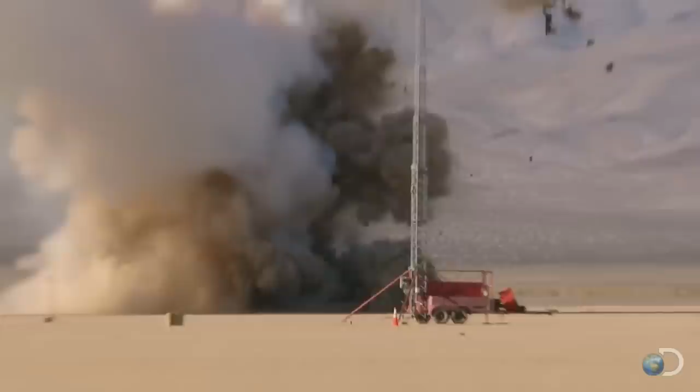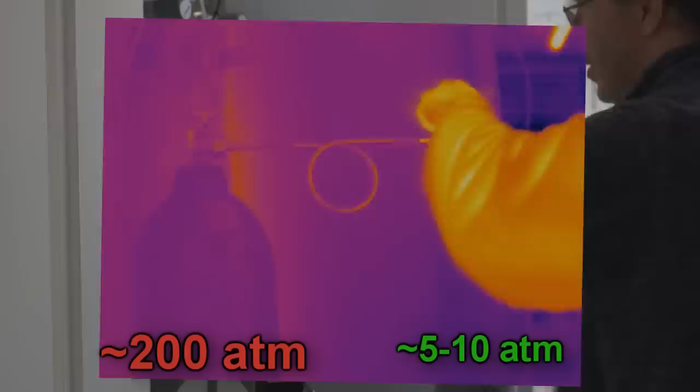Well, actually no, it's a really, really stupid idea. And to show why, I'll be calling on a guy who Elon Musk fans probably think is somewhat of an authority on the subject: Elon Musk. Now, on my last video where I was just showing some of the practical difficulties of dealing with compressed gas, there were lots of comments that said Elon Musk was just joking here. He wasn't serious. It's kind of difficult to sustain that when you see some of his other tweets.

David Jenkins writes, I reckon it's an adapted cold gas thruster used in their upper stage rocket guidance using plain old compressed air, to which Elon Musk replies, using the configuration you described plus an electric pump to replenish air in COPV when car power draw drops below max pack power output makes sense. But we're going to go a lot further. Yeah, he's talking about how he's going to implement this. Doesn't sound like he's joking to me.

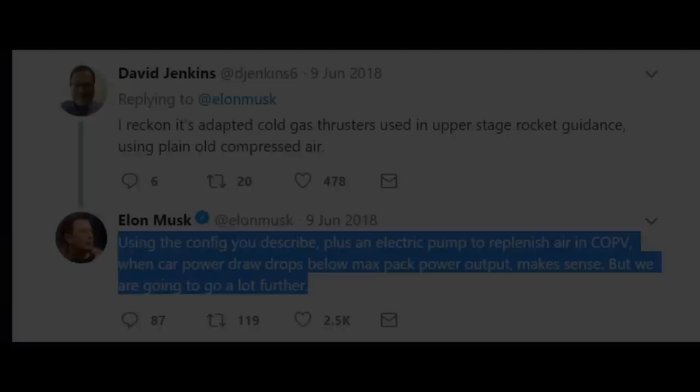We're going to put rocket thrusters on it. For real? Yes. What are they going to burn? Nothing. Ultra high pressure compressed air. Whoa, just gas, air? Cold gas thrusters.

So why is this such a stupid idea? Well, let's start with the most obvious question of all: so what are cold gas thrusters? Well, it's pretty much what it says on the bottle, the compressed gas bottle. So that's all you do is you get a cylinder of compressed gas, air say for instance, and then you just open it up, the gas comes out, and you get some thrust because of that.

About 50 bar of argon. So we get ourselves steady. And fire! The downside is, of course, they don't provide much thrust. In fact, they are some of the least efficient thrusters that you can get.

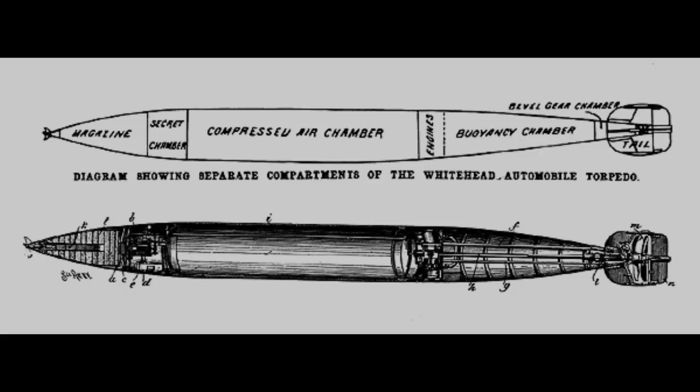Now, compressed gas as an energy storage system isn't quite modern SpaceX technology. This is one of the oldest ideas out there. I mean, really old. The first torpedoes ran on, you guessed it, compressed air. All right, it wasn't a cold gas thruster. They fed it through a little internal combustion engine type thing that ran the propeller.

But there's a big problem with using compressed gas like this as energy storage, and that's as you vent it quickly, it gets cold, really quite quickly. It's a thermodynamic property, you cannot get around it. And that means that you get a lot of thrust at the beginning, and then its ability to provide thrust gets progressively less as the gas gets colder.

Now, this has been known about for over a century, so the very first torpedo designers tried things to get around this. First of all, you put some big radiator fins to sort of try and get some heat into that cooling gas, which of course increases the energy that you get out of that compressed gas. Or even better, why not just inject the fuel straight into the compressed gas in this little engine thing, and hey presto, you've more or less got an internal combustion engine.

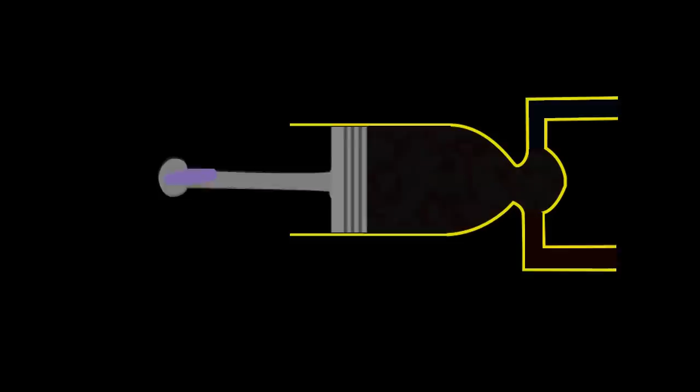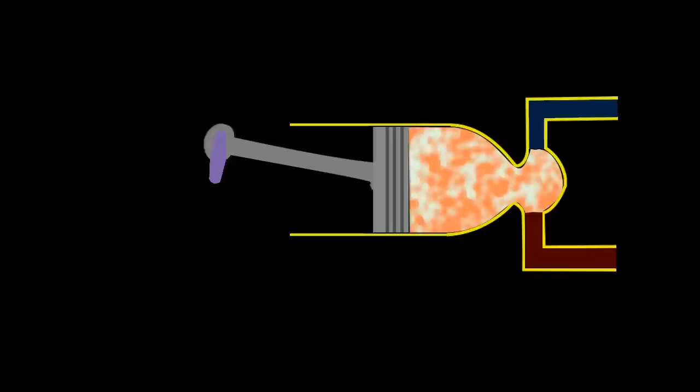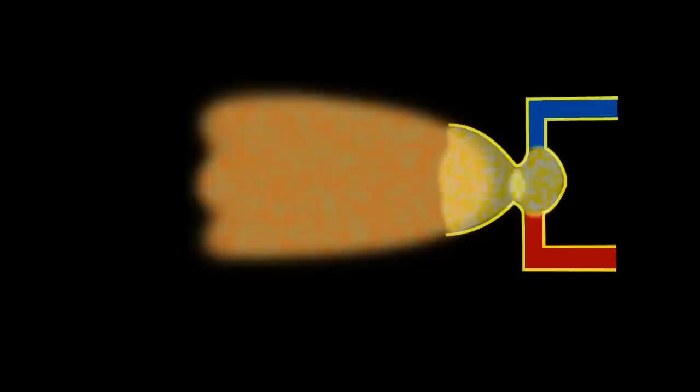However, you can pretty much do the same thing, but you just don't add the fuel. The downside is, of course, it's a cold gas thruster, it doesn't provide much thrust. In fact, they're almost bottom of the barrel in terms of how much thrust you get per kilo of propellant. Now, you may have noticed, just looking around, that you don't see many cold gas thrusters around on cars, while internal combustion engines are fairly common.

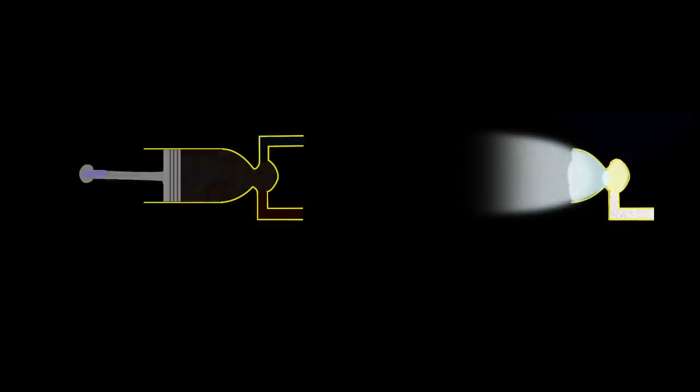And there are two very, very good reasons for this, or more to the point, there are very good reasons why Elon Musk's idea of putting cold gas thrusters, both to help the car maneuver and maybe make it fly, is a really stupid idea. And this is the moment you've waited for, where we call on the guy who Elon Musk fans probably think of as the greatest authority on this sort of thing: billionaire and inventor of the wheel, the hyperloop, Elon Musk.

There are some drawbacks to flying cars. They are essentially a helicopter with wheels, and they make a lot of noise. There's a lot of wind force, and the probability of something falling on your head if there are a bunch of flying cars around is much higher than if there are not.

So you got it, that's why flying cars are completely impractical. They make too much noise, and they create too much air blast. The fact that cold gas thrusters are bloody noisy. Chamber is about 100 psi. Here we go.

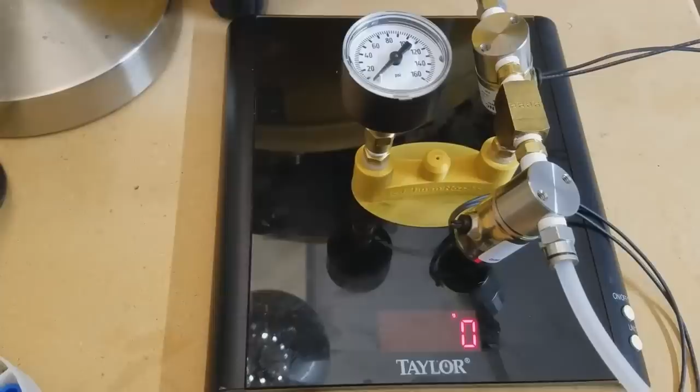And it doesn't really make any difference whether you get the thrust from a cold gas thruster or from a propeller. In both cases, you're accelerating gas to provide lift, or thrust. The air blast's going to be almost exactly the same in both cases. I mean, look, let's just get on the same page here.

This is a 50-litre cylinder. Here I have a 50-litre gas bottle, and it weighs about 50 kilos, which is pretty heavy, to the point where, if I'm in good shape, I should just about be able to lift it, just about. So they're pretty heavy, these things.

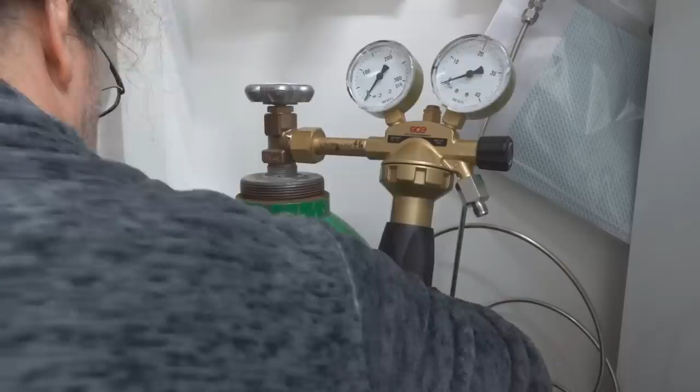Now, this one's actually argon, but we're going to assume for the sake of argument it's compressed air, as it would be with Elon Musk's cold gas thrusters. So let's assume this is an air cylinder for the moment.

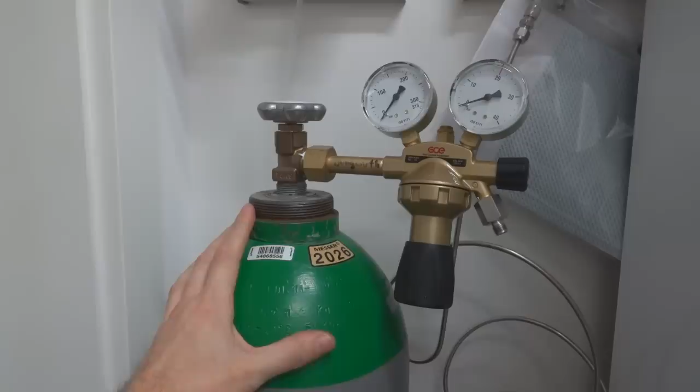So if I take the top off this cylinder and it's at 1 atmosphere pressure, then the volume of the cylinder is 50 litres. The density of air is about 1 gram per litre, so there would be about 50 grams in this cylinder. Now if I put twice as much gas in the cylinder, the pressure goes up to 2 atmospheres, 2 bar, and the amount of gas in the cylinder goes from 50 grams to 100 grams. And now if I go from 2 bar to 20 bar, another order of magnitude, 20 atmospheres, then it goes from 100 grams to 1 kilo. And if I go from 20 bar up to 200 bar, 200 atmospheres, then there's going to be about 10 kilos of gas in this cylinder.

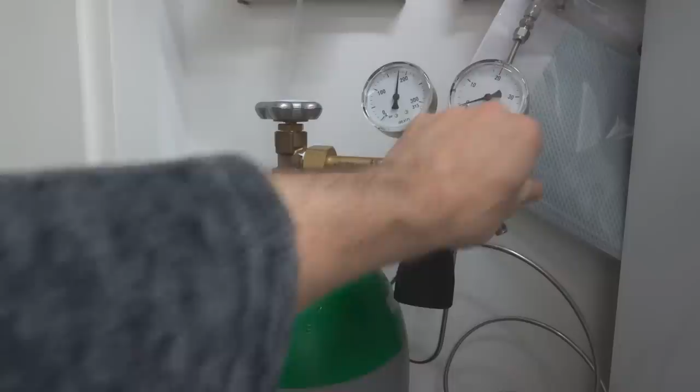And as it turns out, at the moment the cylinder is closed. This is the primary regulator, which tells me how much pressure there is in this cylinder, and it's just short of 200 atmospheres. And then I've got a secondary regulator here which is going to tell me what the pressure is.

So I'm just going to put on, I don't know, a couple of bar, right? And we're going to open it. So that's just a couple of bar, a couple of bar I can hold with my finger, not that big of a deal.

If I jack this up to 6 bar, yeah, it gets harder to hold with my finger. Alright, and if we jack it up to about 10 bar, it now gets really difficult to hold with my finger. I really can't do it.

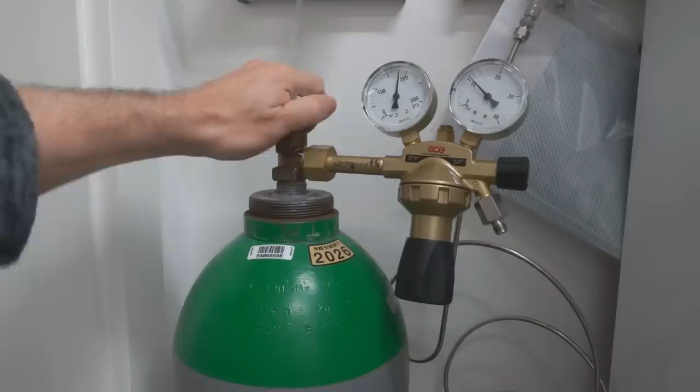Right, that's 10 bar. If I take this off and open the cylinder, that's 200 bar, which, as you can tell, is going to be loud. So let me get a wrench and I'll do that. Okay, so this is now going to be 200 bar, okay? Alright, make sure you're actually braced into the wall.

Loud enough? Whew, it's quite a blast comes off that. But anyway, so that's what 200 bar looks like. And that's basically what Elon Musk would be proposing to use to accelerate and decelerate his cars, which is an absolute farce on so many levels.

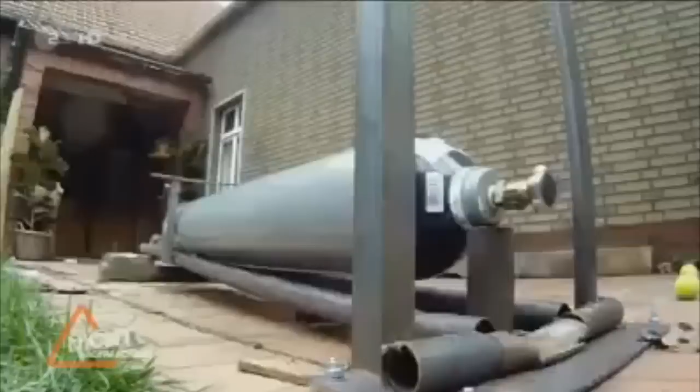Now, for certain, there is quite a lot of destructive energy packed into these high-pressure gas bottles. Hell, you know what originally caused this? Well, it's going to take the sound a little time to get here, but the first thing you're going to hear is the sound of a high-pressure helium gas bottle failing. Then the sound of the explosion arrives.

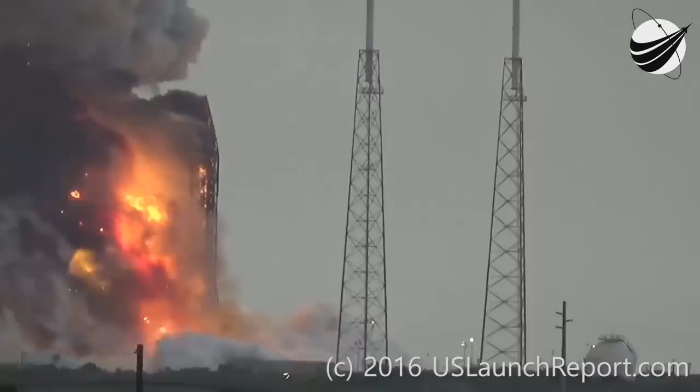Yep, it was a high-pressure helium bottle failing and rupturing the propellant tanks. This is why the cheapest and safest way to handle high-pressure gases is in big steel cylinders like this. And even those at their cheapest are about $100 per shot.

Now, sure, you can about halve the weight of these cylinders if you don't mind about the cost, and make them out of composite materials like Elon Musk wants to do with his car. But this will greatly increase the price. Maybe not something you want to be doing if you're laying off people to try and get the prices of your cars down. But all of these cylinders take in the region of 200 bar, because that's when it really gets quite difficult to contain all of this energy.

Just to give you a feel for these things, for the safety limits, these big steel cylinders are only allowed to be pressurized to half of their failure limit, because you don't want to go near the failure limit. And with the composite cylinders, it's a fifth of the failure limit. Why? Well, 200 odd bar is a lot of pressure, and you have to respect your high pressure gases.

14 pounds per square inch, 14 psi, is about 1 bar, but whatever. Let's not worry too much about the little numbers. Let's just say about 10 psi is 1 bar.

Blast injuries to exposed personnel, represented by this dummy, is usually severe over 3 psi. Here it was 6 psi. So this was about half a bar overpressure, and it throws a guy around like this. A 200 bar overpressure of a rupturing cylinder is terrifying. It's something you don't want to be anywhere near, let alone being on the inside of a car with one of those cylinders. One of these cylinders rupturing in your car means all but certain death.

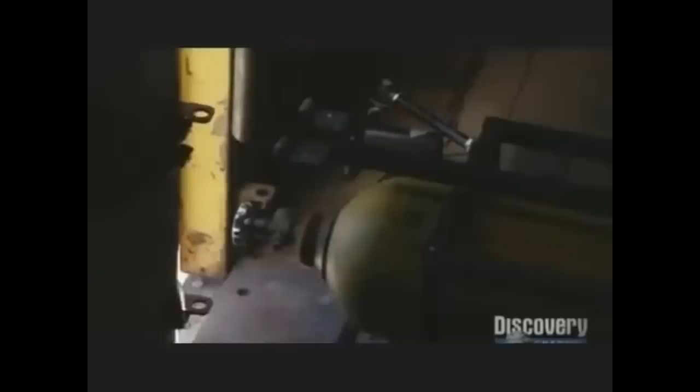The valve has sheared clean off, and that's a very good sign. It looks like the cylinder flew straight and true. At 40 miles per hour, the air tank turned the cinder block to cinders. You know, this was an optimum situation for this tank. What this tank did is as good as it gets.

Well, okay, I'm going to assume the Mythbusters cylinder is about a 200 bar cylinder like mine that weighs about 50 kilos. Those numbers are probably in the right ballpark. And when they opened up this cylinder, it accelerated to 40 miles per hour, which is about 18 meters per second. So the energy is just half mv squared, which is about 8,000 joules, 8 kilojoules, enough energy to shoot this bottle some 50 feet, 15 odd meters into the sky.

So if we were to put that 8 kilojoules of energy into our Tesla, how fast would it be going? Well, a Tesla weighs about 2 tons, so half of the mass is about 1 ton, 1,000 kilos. So V squared is going to be about 8. So V is going to be about 3 meters per second, about 7 miles per hour, that sort of thing. Not looking so good here. But this one may be the slowest ever.

But hey, these are just some ballpark numbers from cylinders losing valves. You know, this was an optimum situation for this tank. What this tank did is as good as it gets.

How would the rocketry people approach this? So hold on, this is all actually kind of coming together. There is some serious possibility here. I can't believe it. But wait, I should totally believe it. I mean, after all, I have played around with fire extinguisher powered hovercraft.

Now, rocketry folk have a way of working out how much bang for the buck you can get out of your propellant.

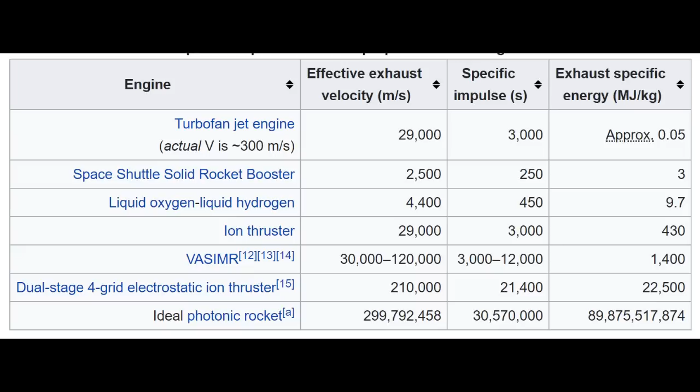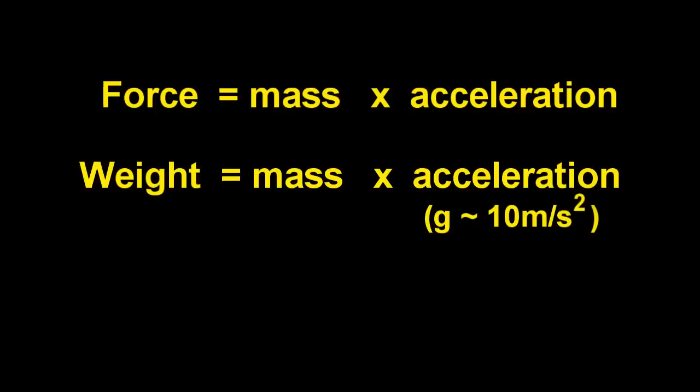Whilst it's correct, it's not necessarily the most obvious. You see, here on Earth, we typically equate weight to mass because they're essentially the same thing, seeing as gravity is essentially a constant here on Earth, and this makes them pretty interchangeable numbers. However, technically they're not. Mass is mass, while weight, like thrust, is a force. It's a mass times an acceleration, the acceleration you experience due to gravity. So, say my mass is 100 kilos, that means my weight is 1,000 newtons.

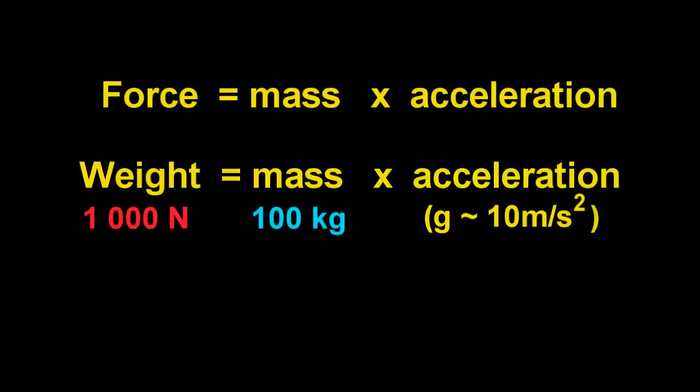Now, specific impulse is how much thrust you get in 1 second per 1 kilo of fuel. But they express that 1 kilo as a force, as a weight. And somewhat confusingly, if you go through all the numbers, you find that this metric actually has units of seconds. But it's basically how much bang for the buck you get out of 1 kilo of fuel.

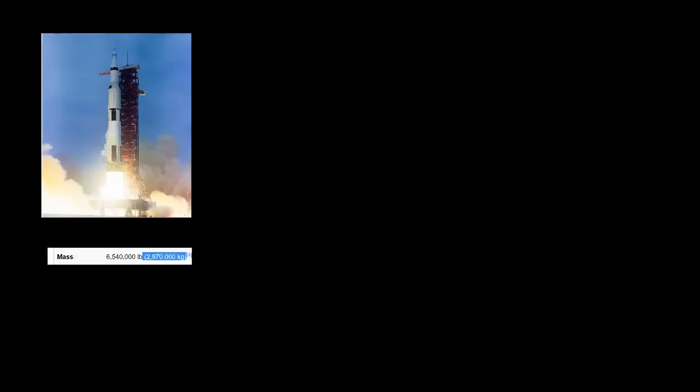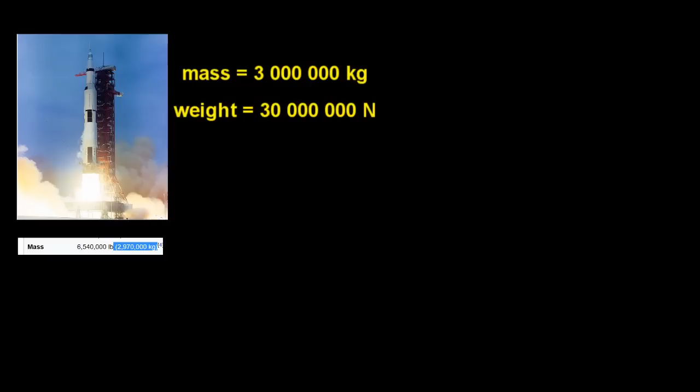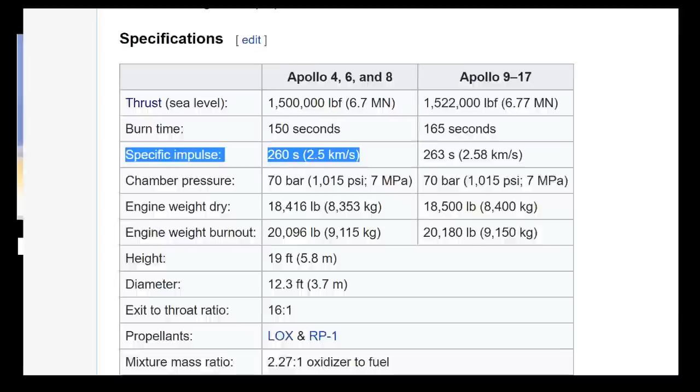So a simple example: the Saturn V had a takeoff mass of about 3,000 tons, 3 million kilograms, or its weight was 30 million newtons. So, if you want to take this off, the thrust the rocket provides must equal its weight - you need 30 million newtons of thrust. The specific impulse of the Saturn V engines was about 260 seconds. So the kilograms of fuel you need to burn per second is about 30 million divided by 2,600, which means you consume about 11 tons of propellant per second, which is about right.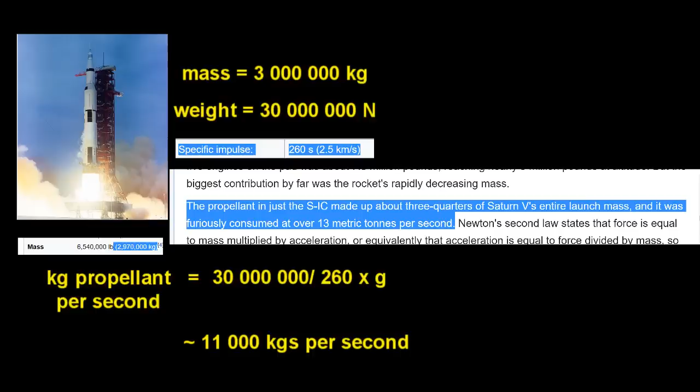Yes, another opportunity to talk about both Teslas and rocket science. I couldn't be more excited. Let's get started. So cool.

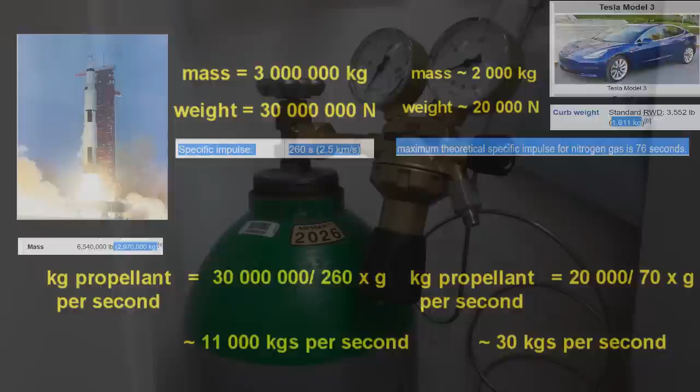A Tesla's mass is about 2 tons, 2,000 kilograms, or 20,000 newtons. The specific impulse of a cold gas thruster is about 70 seconds. 20,000 divided by 700 is about 30 kilograms per second. And seeing as you only get about 10 kilos in one of these cylinders, you would need 3 of these cylinders just to get your Tesla off the ground for 1 second.

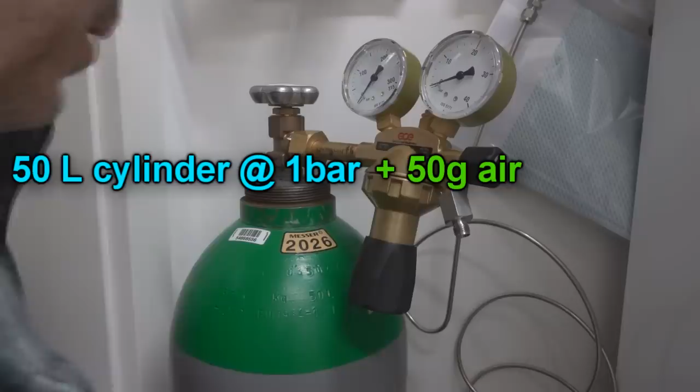But hey, this is the best case scenario, that you get near the optimum 70 or so seconds of specific impulse from your cold gas thruster. In reality, you're going to get nowhere near that, because the amount of useful thrust you get out of a cylinder drops as the pressure drops. So if you have, say, a 50 or so litre cylinder with 200 atmospheres, 200 bar in it, each extra bar you put into that cylinder has about the same mass - they all weigh about 50 grams. So if you're venting the cylinder, you get a lot more thrust out of the first 50 or so grams that comes out, venting it from 200 bar down to 199 bar, than you get out of the 50 grams going from 2 bar down to 1 bar.

Here's a nice simple example using my low pressure compressor, which only goes up to just under 10 bar. This is going to be about 8 bar that we're looking at here on my reaction control system. Let's get steady and...

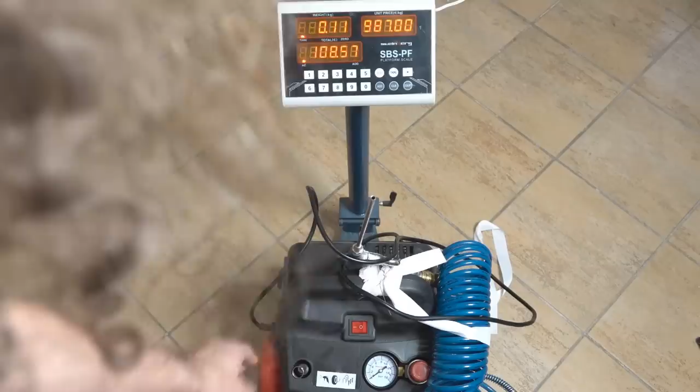Wow, impressive stuff, eh? Here I've got a compressor, and that tells you the pressure in the compressor. At the moment it's empty, and it's sat on top of a balance with the exhaust from the compressor pointing upwards, so this will essentially measure our thrust, and it'll weigh it within 10 or so grams. Just to give you a ballpark feel of the sort of thrust we're going to get off this thing, that's a chocolate bar, Mounds in America, Bounty in England, and they weigh about 60 grams. So that should clock in at 60 grams.

Okay, so let's fill up the compressor first and see how much thrust we can get off - I think this thing goes up to 8 bar.

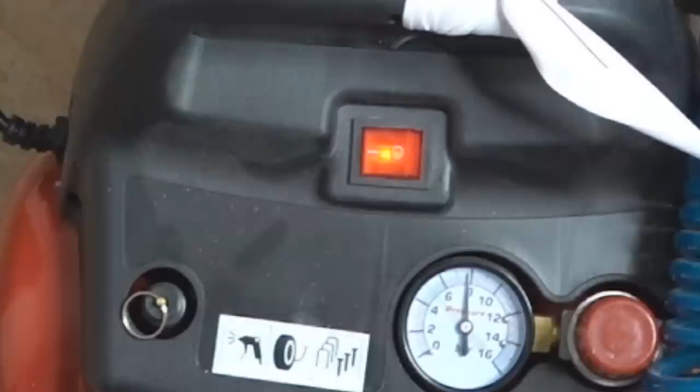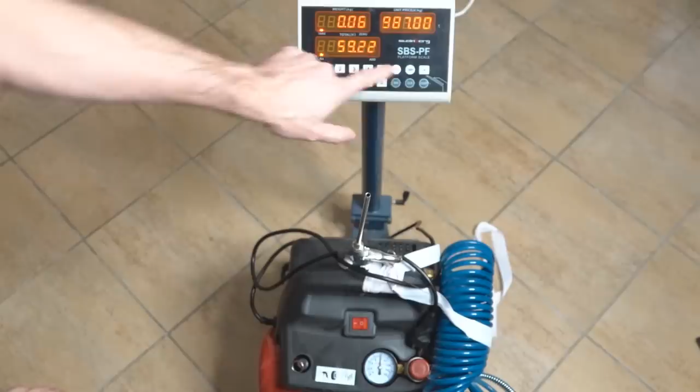Good, so now we have about 8 bar in the compressor tank. So I'm going to zero this. Then I'm just going to hold the exhaust open as we can get, and... that's it.

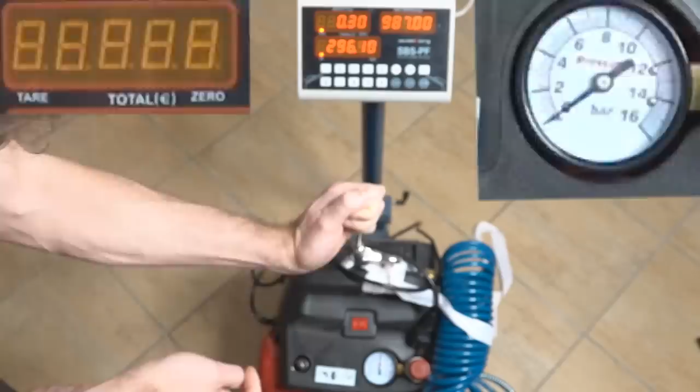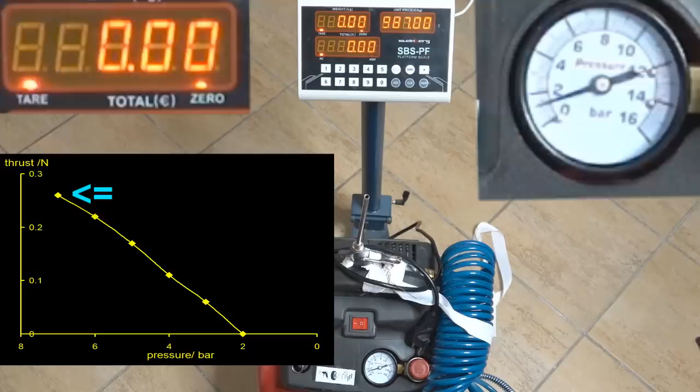So you can instantly see the problem: you only get the good thrust of a cold gas thruster at high pressure. So this up here is going to be a specific impulse of, let's say, 70 seconds. And then, of course, 0 is 0, which means on average, if you're just going to empty a cylinder, you're only going to get a specific impulse of about half the maximum value. Which in practice means it's not 3 cylinders like this that you have to empty in 1 second to lift your Tesla off the ground.

You have to empty about 6 cylinders like this just to lift your Tesla off the ground for 1 second.

At which point we can probably step back and address all the Elon Musk fans who have been complaining like crazy, saying, yes, but you assumed his car weighed 2 tons when it actually weighed something like 1.7. Well, yes, if you now include the weight of 6 of these cylinders, which is about 300 kilos, his car weighs about 2 tons.

But that's nothing. We're not even started yet, because that was me being generous. You see, Elon's talking about using an electric pump, I think a compressor is the technical term, to replenish the air when the car power draw drops below max pack power output. Makes sense, but we're going to go a lot further.

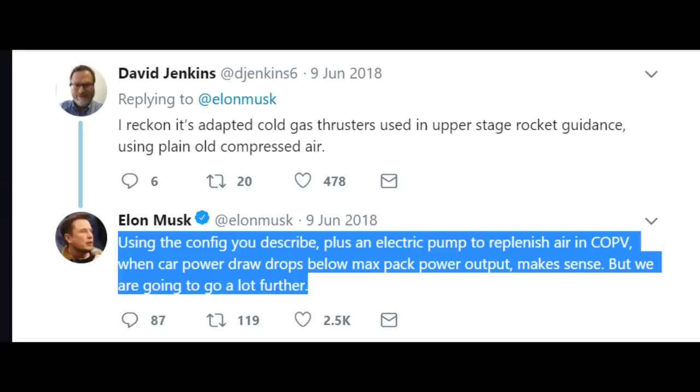I'm not so sure about that, Elon. I mean, it's a great idea, using compressors on board the car to give you unlimited instant thrust, just at the push of a button. It's that simple. I wonder how long it'll take to fill those cylinders.

Now, obviously, you're going to need a high-pressure air compressor, something that'll go up to about 200 bar. Bear in mind, this is just an electric 10 bar gas compressor with a tiny reservoir.

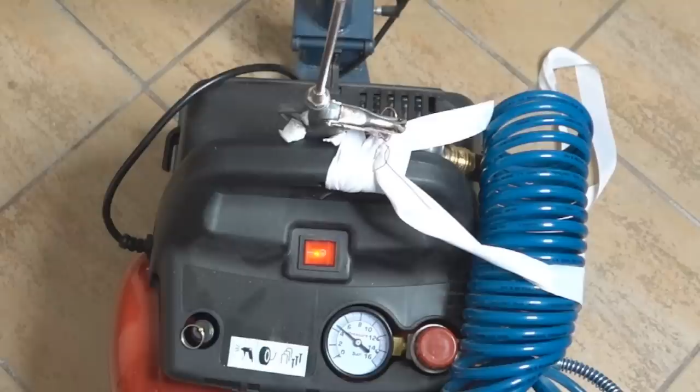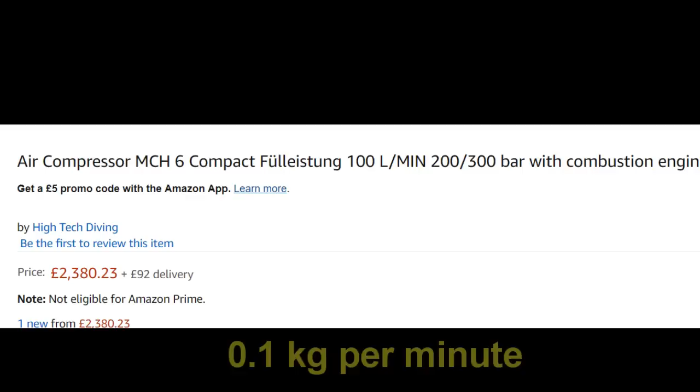So you're going to need something like this, which weighs about 50 kilograms. The compressor alone weighs about as much as one of these big gas bottles. And it pumps about 100 litres of air per minute. Now you'll recall that 100 litres of air weighs about 100 grams, so 0.1 of a kilo per minute.

And to fill a cylinder like this with 10 kilograms of gas, that means you would have to have this thing running for about 100 minutes, about 2 hours, just to fill 1 cylinder.

So the air pump could draw power from the power pack whenever there's spare power to be had, which is apparently most of the time. And bear in mind, you've got to fill 6 cylinders like this just to get your car off the ground for 1 second.

So with just one 50 kilogram compressor, it would take about 12 hours to fill all 6 cylinders. Or, if you went for 10 or so compressors, half a ton of compressors in your car, you could probably get that down to 1 hour. Sure, the weight of your car would be almost entirely compressors and cylinders, and it might be quite noisy having all those compressors in your car, but you might be able to get it to fly for 1 second.

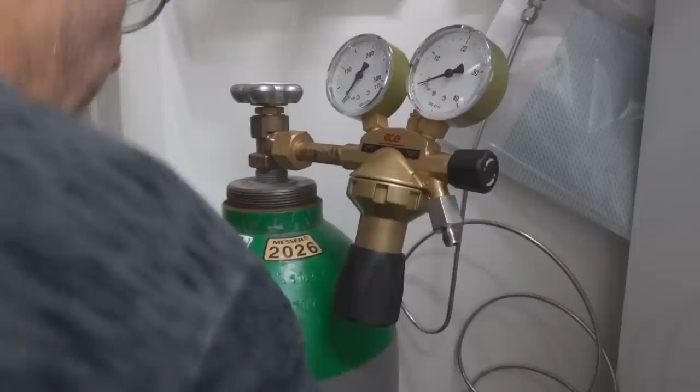Now at the moment, you may have noticed that I've kept everything down to basically a 50 litre, 200 bar cylinder. It's a useful benchmark, because that's when the safety limits for these things typically run out. However, apparently Elon Musk wants to go up to the best part of 1,000 bar.

Now, do you have to have air tanks, or are they just sucking the air out of it? Okay. Yeah, just have an electric pump. Whoa. Pump it up to like 10,000 psi. And how fast are we talking? 0 to 60? How fast do you want to go? In a giant gas cylinder on the back seat of his car.

Coincide with Elon's reply to me on Twitter asking how big the COPVs would need to be in order to have a substantial impact on performance. His response would be that they replace the back seats of the Roadster with the COPV tanks.

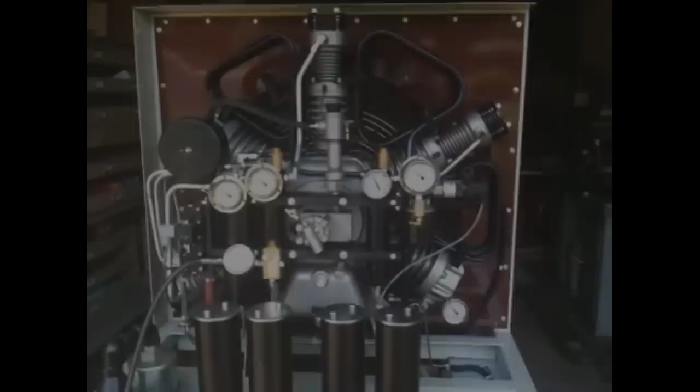I mean, let's just ignore that by the time you get up to that sort of pressure, you need 5-stage compressors. Where he's going to put it, I'm not entirely certain. But really, let me just put 10,000 psi, which is what Elon Musk is proposing, into perspective. The chamber pressure of a howitzer when it's firing maxes out at about 5 times the pressure of the cylinder that Elon Musk wants to put in on the back seat of his car.

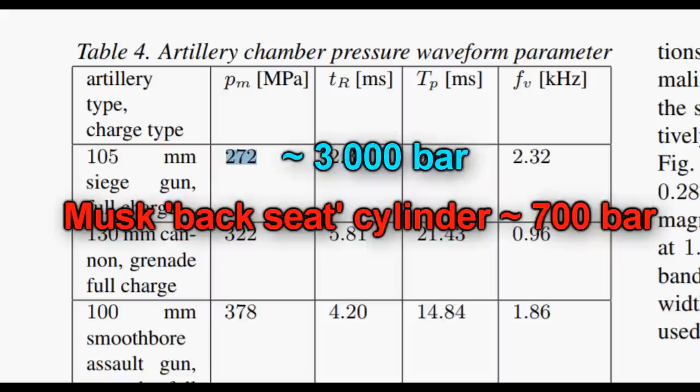Yeah, the backseat of his car is now literally a bomb. But what if rather than trying to get the car off the ground, you use that to augment acceleration or for emergency braking?

Well, 6 cylinders or so will get you an acceleration of 10 meters per second squared for about 1 second, giving you a velocity of about 10 meters per second. That's not bad, that's like 20 miles per hour. But on the downside, you can only do it for 1 second every 12 or so hours. And all it took was adding another half a ton or so of weight to the car and turning it into a compressed air death trap.

Not that any of this remotely matters anyway, because Elon Musk himself pointed out the problem with using air to accelerate cars. There are some drawbacks to flying cars - they're essentially a helicopter with wheels, and they make a lot of noise. There's a lot of wind force, and the probability of something falling on your head if there are a bunch of flying cars around is much higher than if there are not. Doesn't matter whether you're getting that air thrust from cold gas thrusters or propellers, it just creates way too much noise and way too much air blast. Having 700 bar gas jets on the back of your car is just a recipe for inadvertently killing anyone who happens to be standing behind your car at the touch of a button.

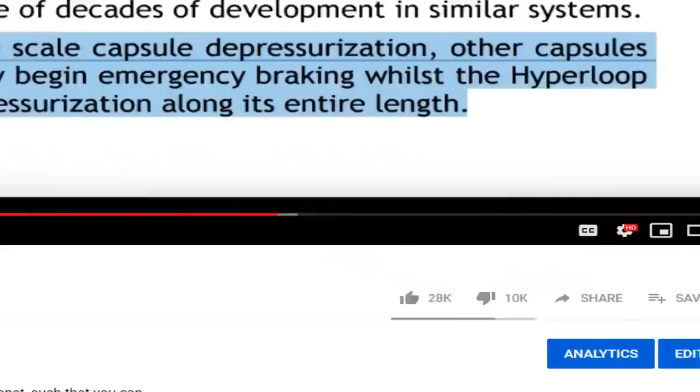But what really gets me is just how devoted the cult of Musk is to such crazy ideas. You only have to look at the videos I've done on the most demonstrably stupid ideas of Elon Musk, and it seems to be a fairly simple correlation: the more stupid the idea is, and the easier it is to debunk, the more the cult of Musk turn up to downvote it. Remember, why don't we use giant methane, fossil fuel-powered rockets to replace airplanes?

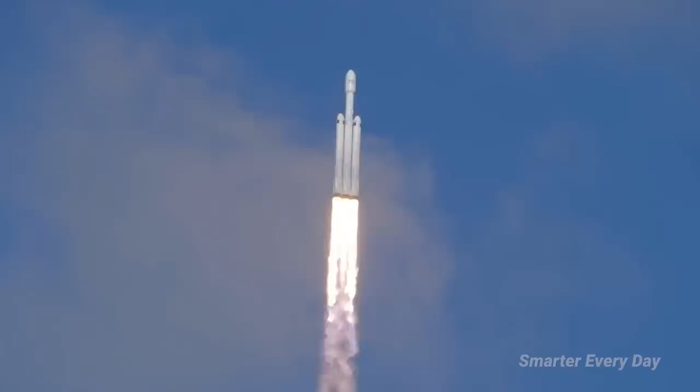That definitely goes against Tesla's green initiatives. And what was Elon Musk's objection to flying cars? Oh that's right, they make way too much noise. But flying giant rockets all over the planet - pretty much the noisiest transport on the planet. We're going to fly BFR like an aircraft, all the bloody time. Nah, Elon Musk fans love it.

Fly halfway across the globe, you'll be on the BFR for roughly half an hour or 40 minutes. And the longest part of that - yeah, it's so awesome. Yes, which is completely awesome. Except by the time that becomes practical, we'll all be traveling by personal rocket pack. The longest part of that flight is actually the boat out and back.

I mean, Gwen, come on. This is awesome, but it's crazy, right? Like, this is never going to actually happen. Oh no, it's definitely going to happen. No, it's not going to happen. And there's a very good reason for that.

Look, there's been a lot of very, very smart people working on rocketry over the past 50 or so years. There's kind of a practical limit to how safe you can make rocket engines because of the extreme conditions they work under, which, if you're lucky, means that you're going to blow up about one rocket in every 100. That's not really passenger friendly. If it really was that easy to make rockets that are hundreds to thousands of times safer, I think someone might have worked that out by now.

And let's talk a little bit about the business. Everyone thinks rockets are really expensive, and to a large degree they are. Yes, they are expensive, which is why this is a really stupid idea. If only there was some sort of dumb justification that would somehow make this dumb idea even dumber. And how could we possibly compete with airline tickets here?

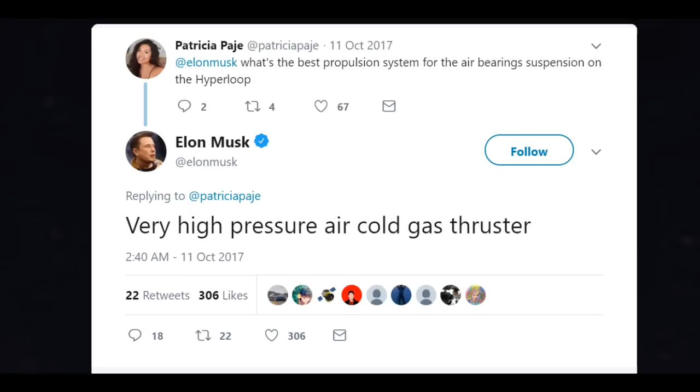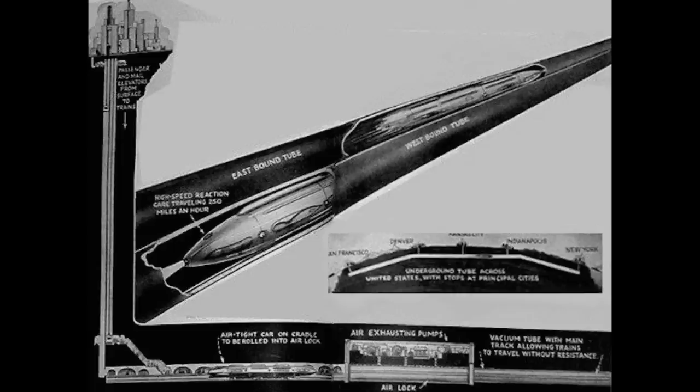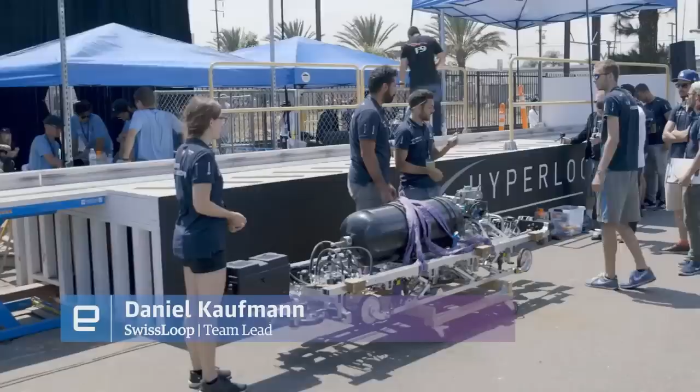And how far, pray tell, has Elon Musk's easy idea of putting together the Hyperloop come in 5 or so years? He is no closer to building a Hyperloop than Goddard ever was when he proposed the concept of the Hyperloop, or vacuum train, over 100 years ago. But in a wonderful crossover, one of the Hyperloop entries into Elon Musk's Hyperloop design contest used cold gas thrusters, not for levitation. None of them have managed to do that yet, despite Elon saying how easy it would be to just put little air skis on these things.

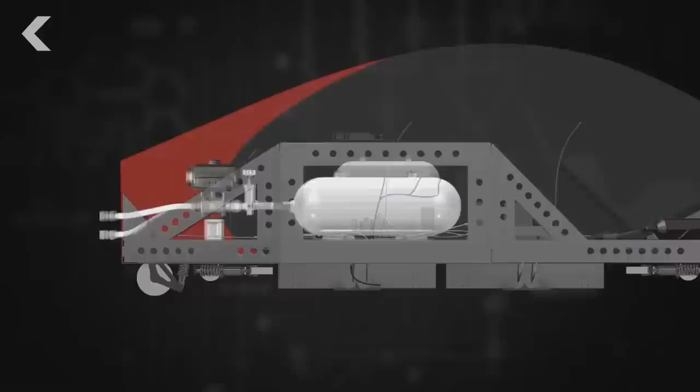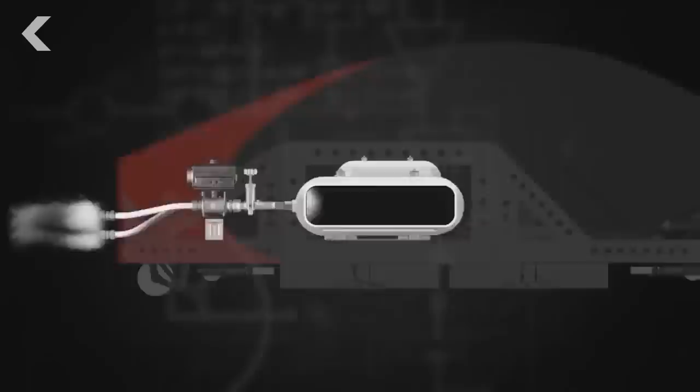Now, they used cold gas thrusters for acceleration. It works like this: two high-pressure tanks filled with nitrogen gas empty about 90% of their mass over the course of 3 seconds. As the gas exits, it converts thermal and pressure energy into kinetic energy. It vented the gas into the vacuum chamber, which of course partially destroys the vacuum. I mean, damn, this is more soapbox derby than the future of transport.

So here you can see the true power of a cold gas thruster powering something a little smaller than a Tesla. Okay, a lot smaller than a Tesla. You can see the rough size of the tank that gets this thing up to an amazing about 40 kilometers an hour. That's less than 30 miles per hour.

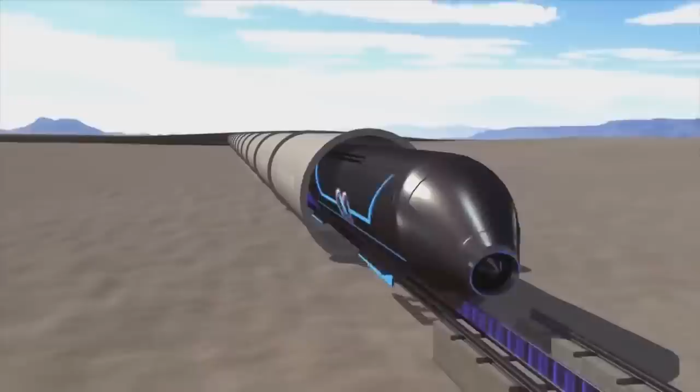Yeah, this is also something that drives the Elon Musk fans crazy, is when you tell them that he's not the visionary who invented the Hyperloop. He just took somebody else's idea that was over 100 years old and gave it a new name. I have a name for it, which is called the Hyperloop. The Hyperloop? Hyperloop, yeah. Oh, genius.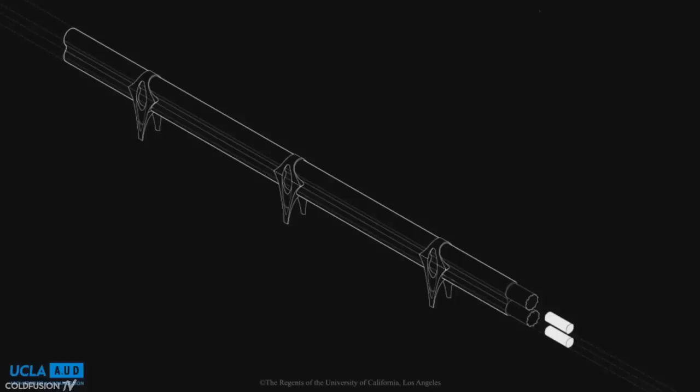It's almost like the reason that no one has ever built one of these 600-mile-per-hour vacuum trains. The Hyperloop intends to propel passengers through a low-pressure vacuum tube at speeds up to 700 miles per hour. It's because it's insanely difficult, insanely dangerous, and insanely expensive to do. Seriously, the Hyperloop makes the whole flying cars thing seem like a cakewalk.

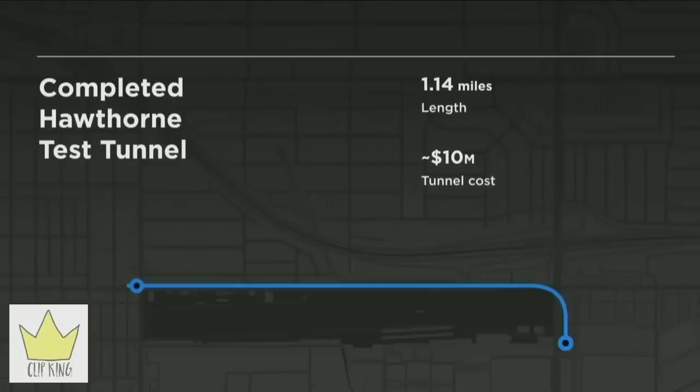Or when Elon Musk claimed that he, with no experience, dug his first tunnel 100 times cheaper than all of the world's experts could ever have done, on his very first tunnel. Normally, tunnels cost up to $1 billion. A discount tunnel would be sort of $200 million. But we're able to build this tunnel for about $10 million. So he claimed he dug it for 1% of what it would cost real professional engineers to do it.

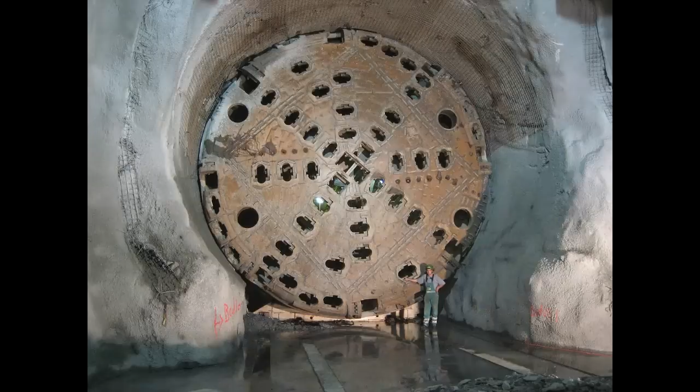A claim that is preposterous on first inspection. And when you take a look at the actual numbers of what it would cost to dig such a tunnel, you find that Elon Musk's digging costs were almost exactly the same as everyone else's digging costs. Now, Elon Musk isn't a visionary here. He's a fantasist. This isn't science, it's science fiction. The emperor has no clothes on.

And when you live in a fantasy land, you could as well go for the flying cars or the supersonic vertical takeoff and landing electric jet. The ideal long-distance transportation mechanism is a supersonic vertical takeoff and landing electric jet. Or nuclear-powered commercial airliners. Are we about to reach new limits with cars? We have supercars, we have hypercars. Is this the start of a new generation of super ultra hypercars? Maybe. And I couldn't be more excited.

Or hell, let's be real, why not go for the thorium-powered cars running on solar freaking roadways? But if you're willing to suspend your disbelief to this extent, I really don't understand why you stop with Musk. I mean, I heard of this amazing new invention from Stark Industries? Some form of nanotech that allows you to fight space ogres and fly faster than any of Elon Musk's spaceships. You know, the ones that blow over when it gets a little windy.